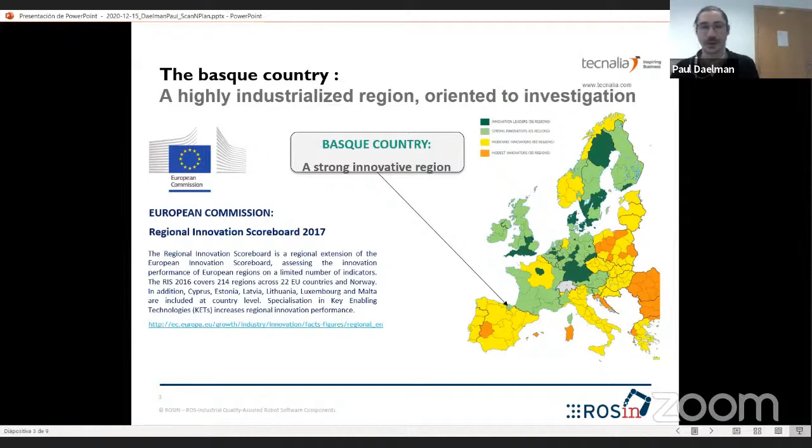We are based in the Basque Country, a very industrialized region. According to the 2017 Regional Innovation Scoreboard, the Basque Country has been classified as a strong innovative region by the European Commission. We have a strong industry here, gathering machining tool manufacturers, train and bus manufacturers, and big suppliers for the automotive sector. Combined with the biggest investment for R&D in Spain, this makes a good environment to introduce the ROS-Industrial problematics.

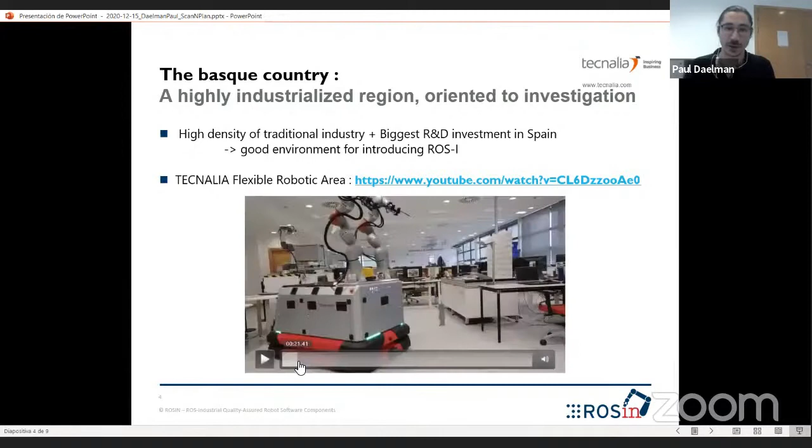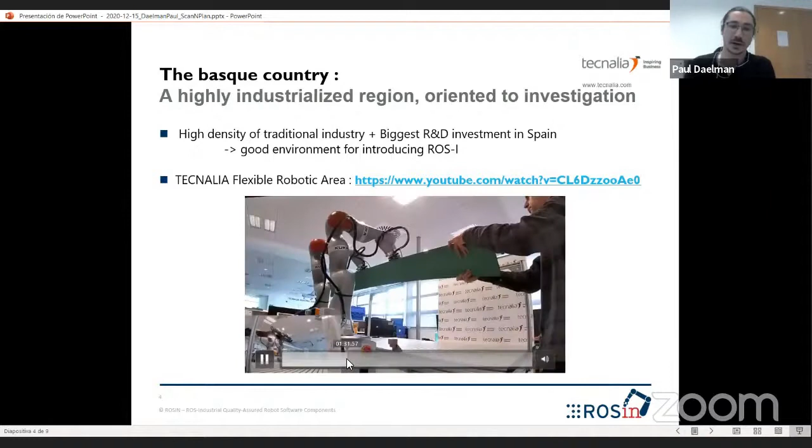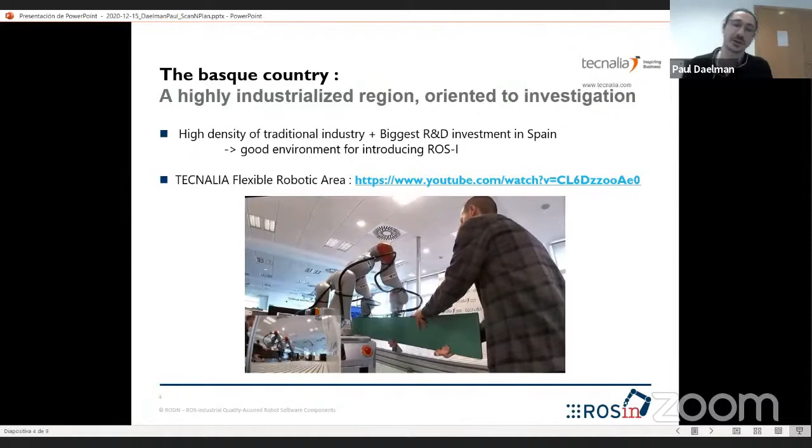More particularly, here in Tecnalia Robotics, we deal with various aspects of robotics. I won't show you the entire video because it's quite long, but this is a result of some projects we are dealing with. We work with mobile manipulators, also dealing with things like perception of humans or parts, working with collaborative robots, and implementing various applications oriented to collaboration and collaborative robotics. Feel free to ask for more information about that during the exhibitor time. We will be present to give you information if you want.

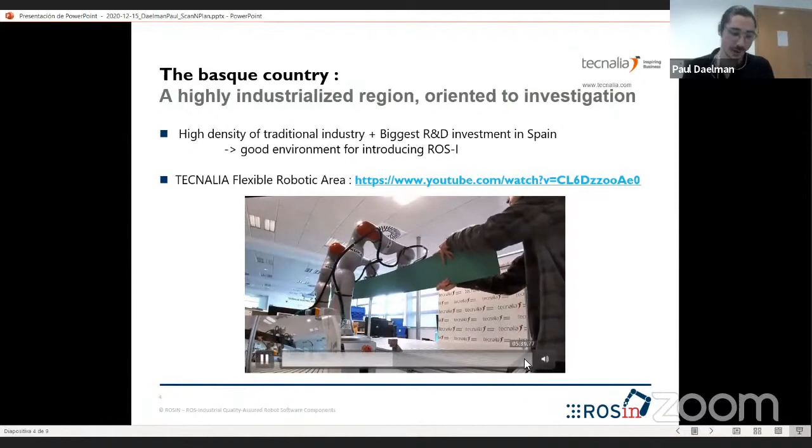So that's for Tecnalia. So why did we decide to show the ScanNPlan demo?

Initially, we planned to present this demonstration during the Bienal Internacional de la Máquina Herramienta, the International Machine Tool Exhibition, which should have taken place in Bilbao this year during the month of May. But due to the COVID crisis, this event has been cancelled, which is quite sad for us.

The objective was to show that ROS provides helpful tools for complex robotic applications, and that an application like ScanNPlan deals with various problematics difficult to overcome with traditional programming, such as huge amounts of different parts, possibly unavailable CAD models, and flexible and deformable parts in applications. All those problematics are quite difficult to overcome with traditional programming, and require a lot of time and resources to do without the ROS environment.

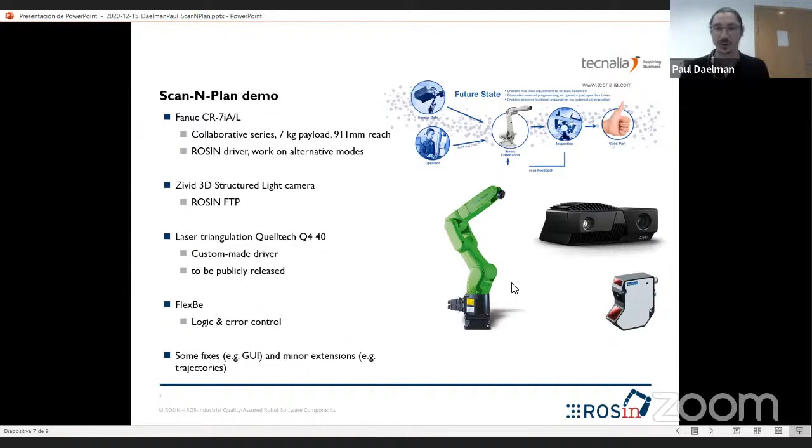So let's switch for the live demo. Hope it will be doing well. I'll be changing my setup, so...

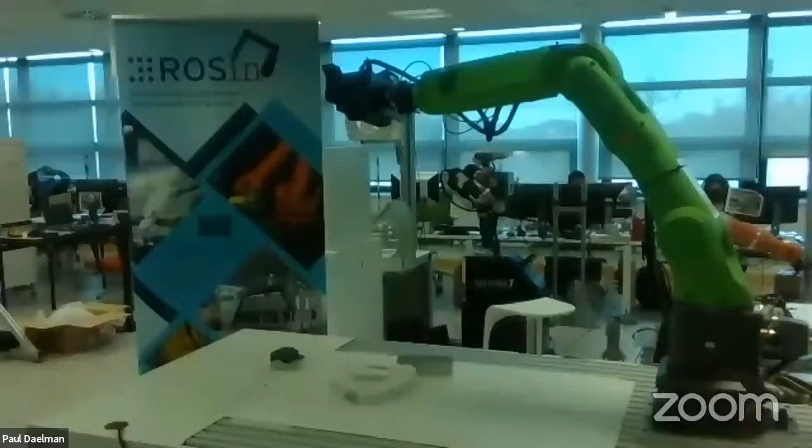Here you should be able to see the robot actually in the lab. And I will be showing the Ubuntu desktop, so you can see what we are doing also on the Ubuntu side. So here we have the ScanNPlan app with a different values panel, allowing us to control the app.

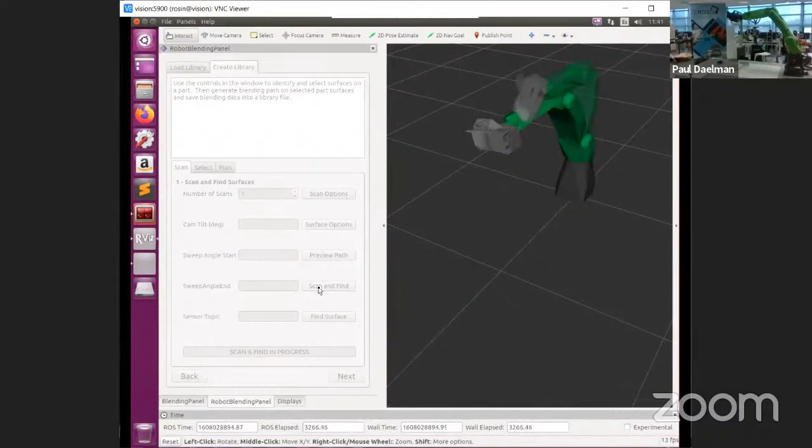From here, we are able to start a process and start actually using this ScanNPlan application.

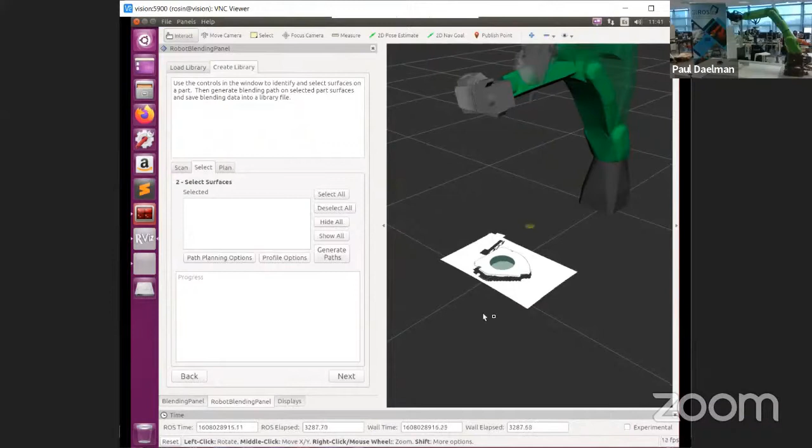So here we can see the result of the scanning process. The photo in 3D has been taken thanks to the Zivid camera you can see here on the manipulator. And we are looking for each plane surface on this photo.

So here we detected 2 objects on the scene. You can choose to work with one or another. And the application now allows us to automatically generate 3 different trajectories.

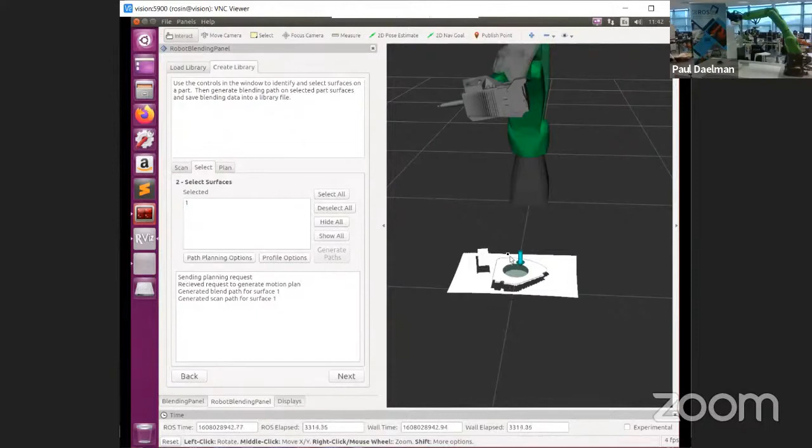The first one will be the whole blending of the surface. Secondly, will be doing the whole contour of the parts. And we have a last pass of scanning to show how good the process has been.

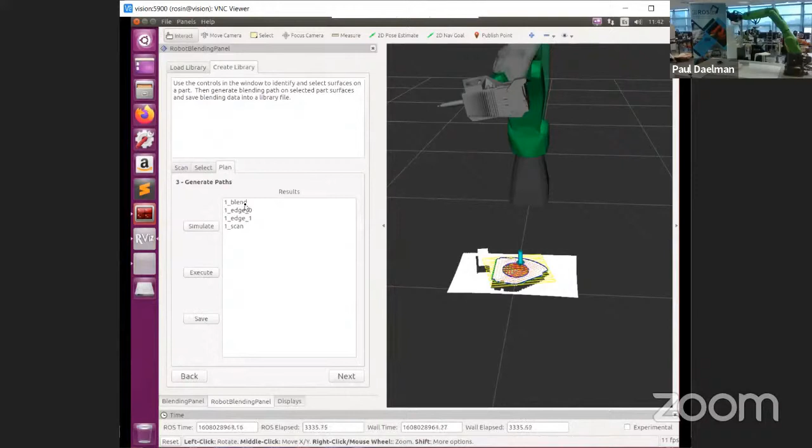So here we are able to simulate the process in case you want to assure yourself that the application is doing correctly. And you can execute each pass of it with the actual robot.

So here the robot is blending the whole surface of the part.

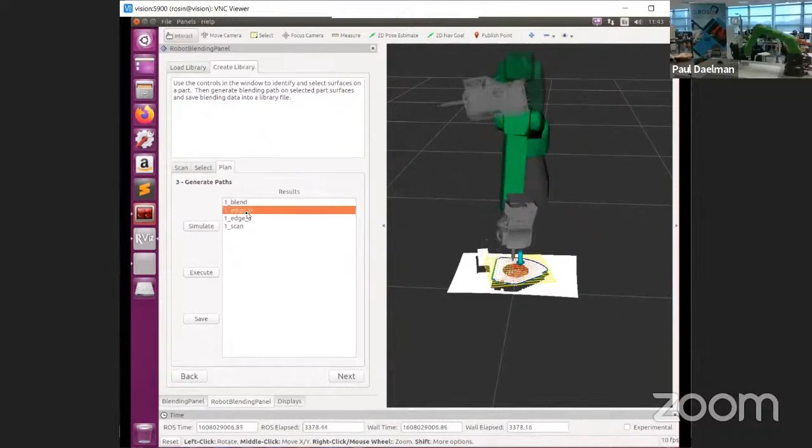In a second time, we detected 2 different edges on the part, so we can also use those paths and execute it.

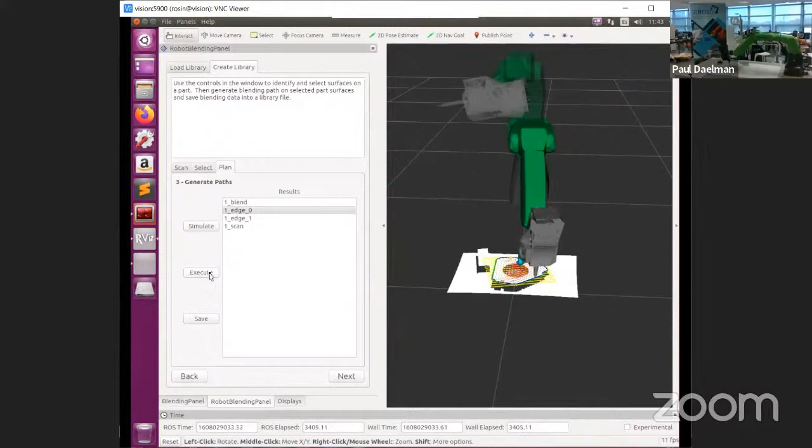So I hope that you can see properly the robot moving on my webcam. Yes, we can see. Yes, good.

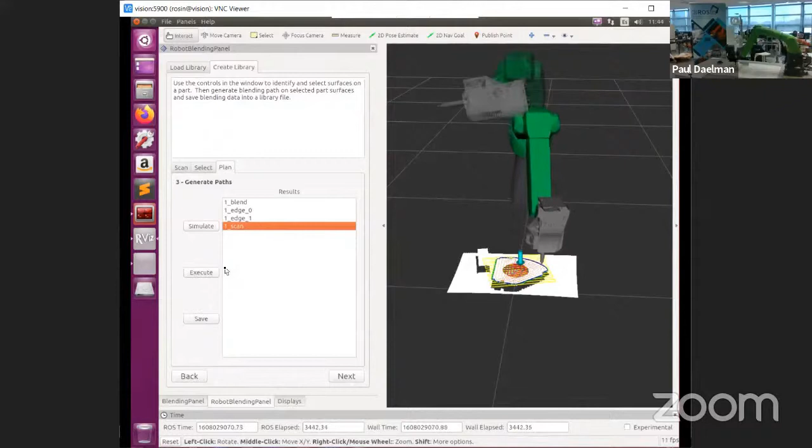And as a final process, we're also using the Qualitech laser to do some quality measurement on the part, being able to actually verify if the process has been done properly.

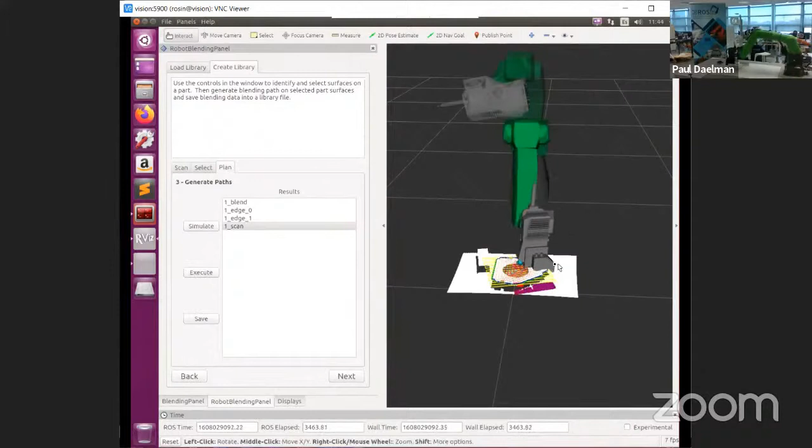So here, I didn't specify it, but the end effector of the robot comes with 3 different TCPs. Here we are using the laser TCP. We also have one dedicated to the Zivid camera, and the third one for the tool. So depending on what application, what movement we are executing, we use a different one.

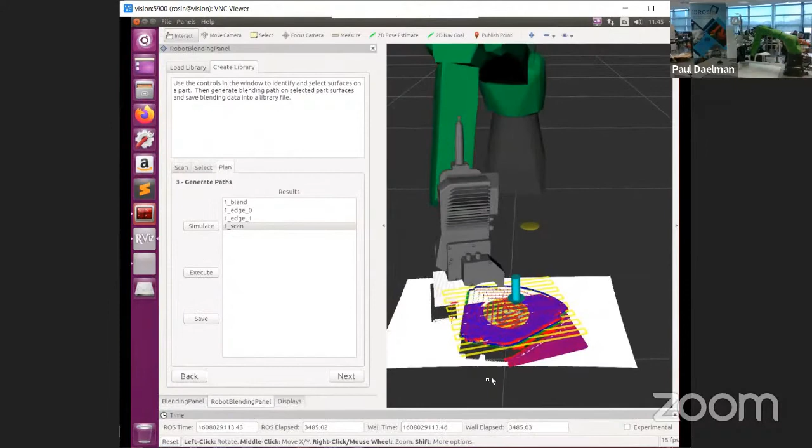So you can see that the laser is actually filling a new point cloud, which is actually another detection of the part that can be used to ensure that the process has been done correctly.

In addition to this application, we were also using the FlexBE environment, which provides us tools to automatize the entire application, do some error control, and log different problematics that can occur during the application. So it gives us the opportunity to make a whole automatized process.

So to show you a little more of the versatility of the application, I will change the parts' places. So with the new setup, the application will start, I hope.

Maybe we're experiencing some trouble with the FlexBE app. Okay, so I won't be able to start it. Sorry for that. So let's do it the old manner.

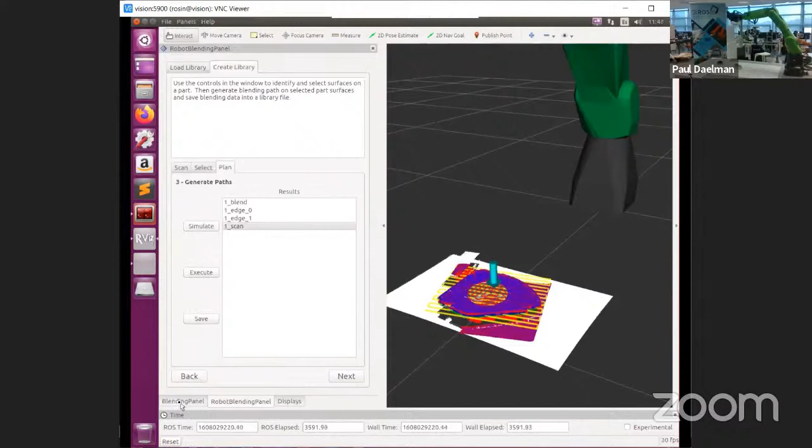So here we are grabbing a new photo of the scene. You can see we now have just one part on the scene.

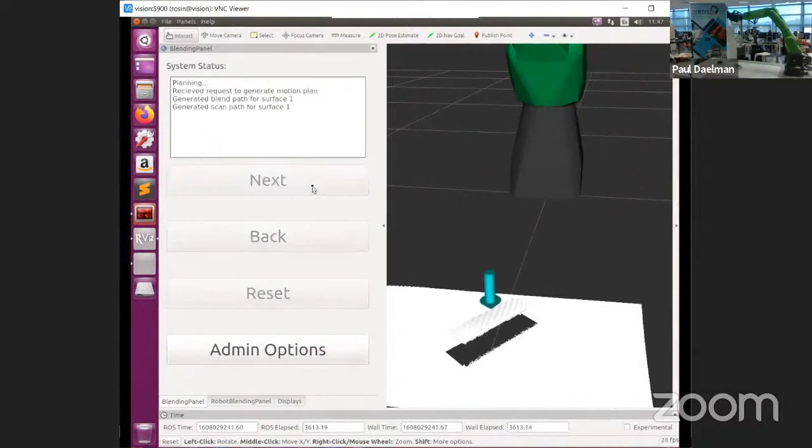We're actually generating trajectories again for this new part. So we generated 3 trajectories: one for blending the whole surface, one for the edge, and one for scanning.

We are now able to simulate all 3 trajectories, and now able to execute the whole process with the real robot.

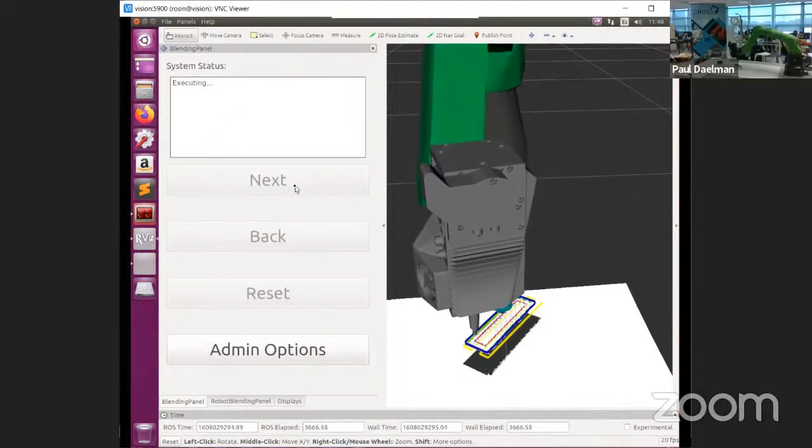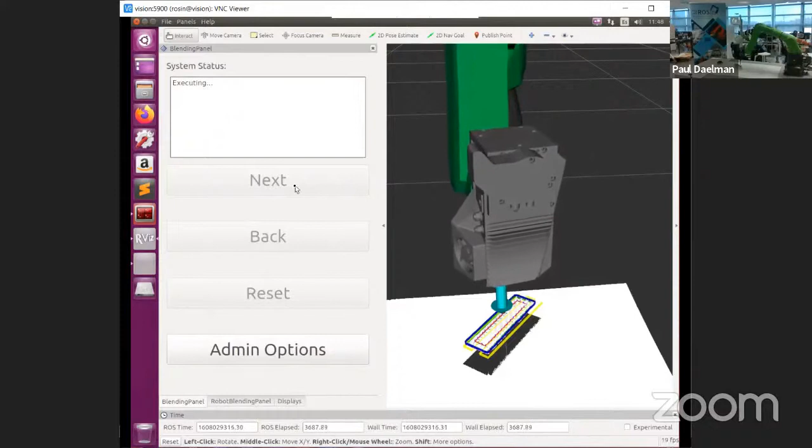So this kind of application really comes with high versatility. We are able to work with different kinds of parts that can be placed wherever you want in the scene. We are able to gather different point clouds if you are working with parts which are bigger, so that you can't have a correct view of it with a single photo.

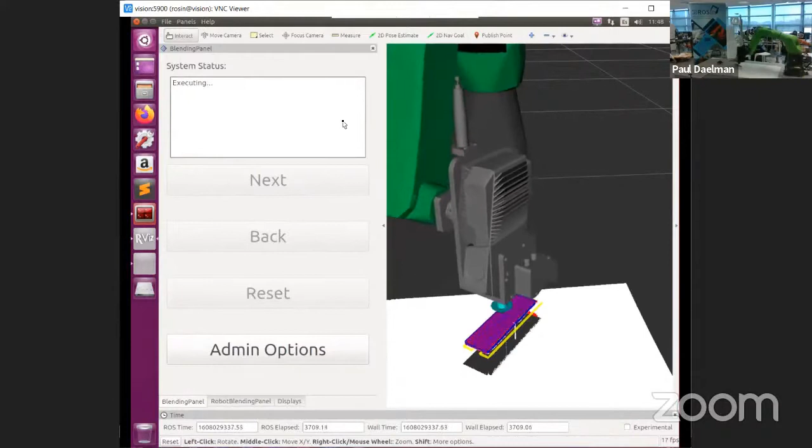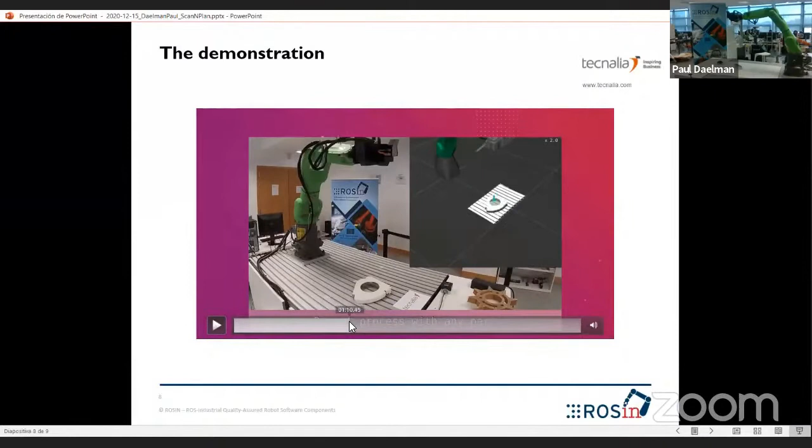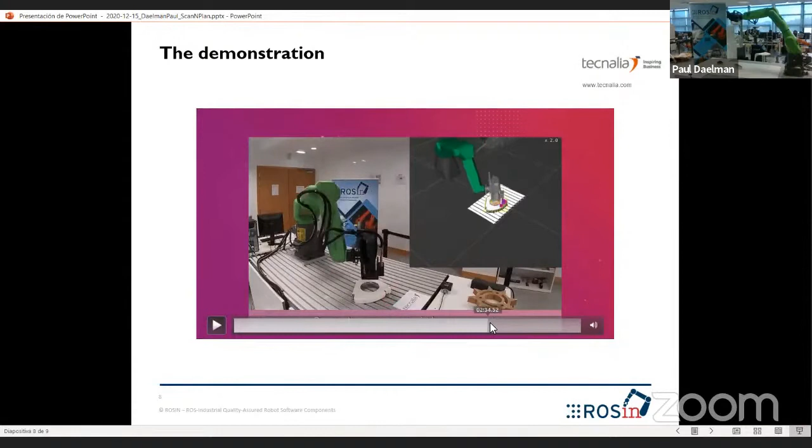Actually changing parts, you're also able to define different kinds of trajectory as the application requires. As an example, here for the same part, we are generating different trajectories. One will be using the biggest concave polygon to do the scanning, the blending part, and one which will be running the whole part and the whole field of the part.

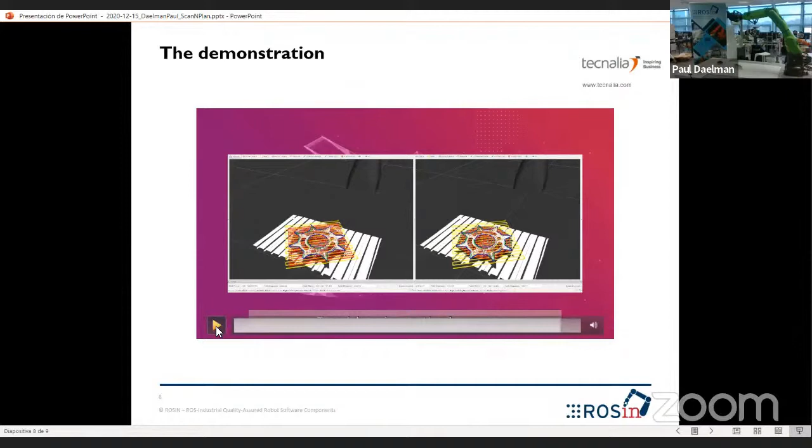So that's it for this presentation. I hope you find it interesting and relevant. Thanks for your attention, and I will be pleased to answer your questions at the end of the session.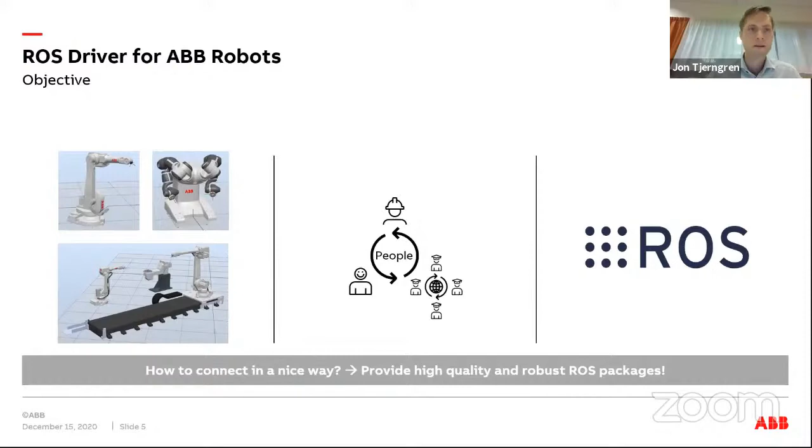Okay, so as a small recap, I had a presentation at the ROS-Industrial Conference 2018, which was also due to the ROSIn project, where I presented some communication packages I had developed for interacting with ABB robots. So I have naturally built upon those packages to create a ROS driver for ABB robots.

And the driver basically consists of 3 main nodes, and this is to separate the concerns, to make it easier to maintain, and also increase the flexibility, so you can use the parts that are useful or needed for the application in mind.

So 2 of the nodes are using something called Robot Web Services interaction, which is for general purpose interaction. You can use it to collect robot state, trigger IO signals, and start the program running on the robot controller. Then there's another node for using something called Externally Guided Motion, which is more for direct motion control, and it's based on using a ROS control based node. So these nodes are basically ready to run after a short configuration.

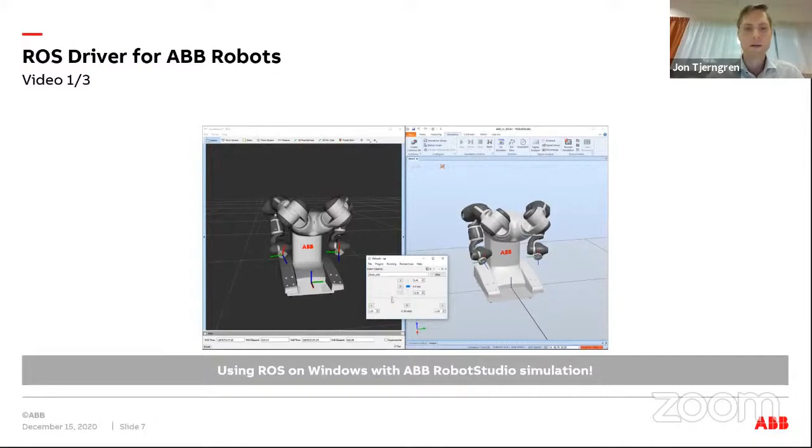Okay, so to the left we have RViz in Windows and a slider that I'm moving, and this basically moves the robot in Robot Studio to the right.

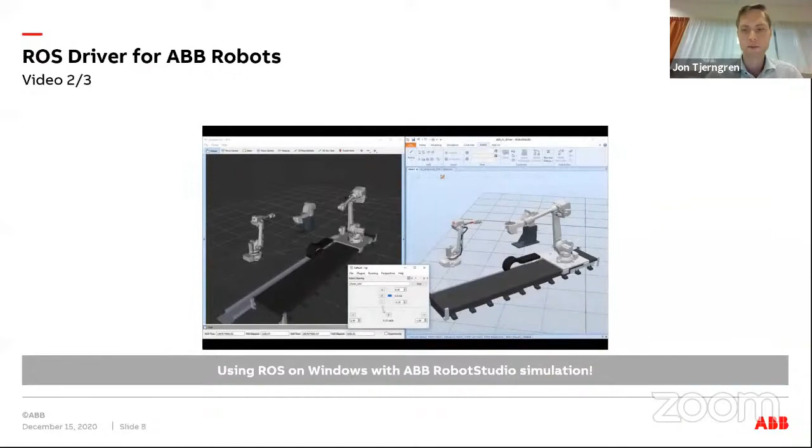So this was a very short video, but you can also have a more complex setup. So with 2 robots and a linear track and a positioner, and you can basically do the same after a few minimal configuration changes to the ROS side.

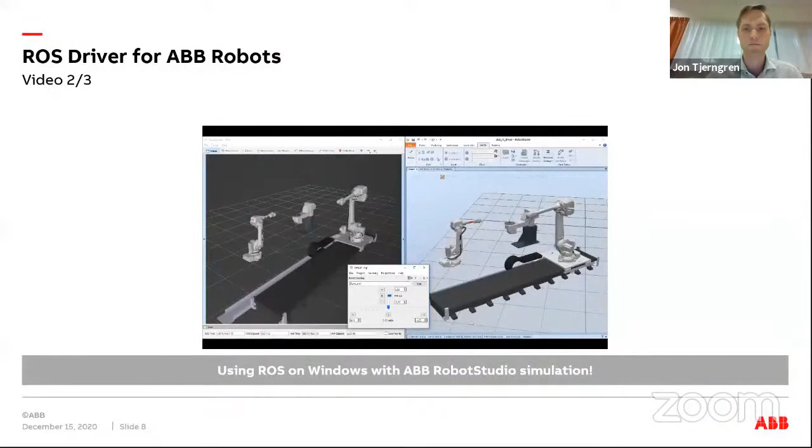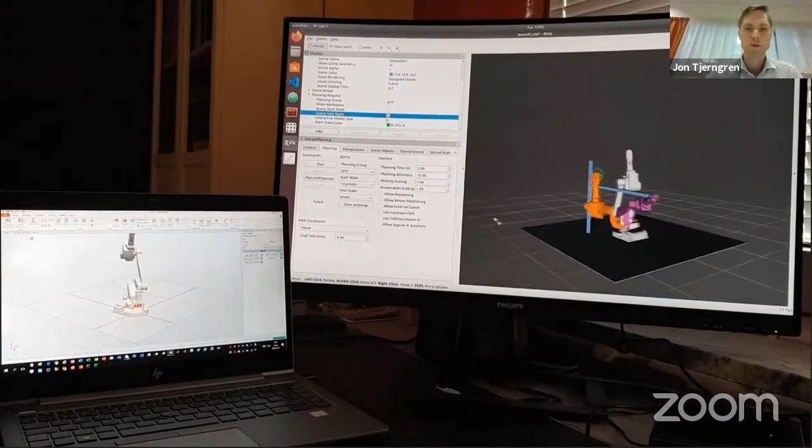And then a third video is for using ROS on Ubuntu in combination with MoveIt. So to the right you have MoveIt, and you can select a goal pose, and then send a plan request, execute request, and then the robot moves in Robot Studio, and it is reflected in the RViz application.

And it finally went to the goal position.

So this was very briefly about the ROS driver I had developed, and here are some key points. The ABB robot driver packages will be released as is on GitHub, which means that this is not a product from ABB. So it will only be limited support that users can expect.

And the open source release on GitHub is planned by end of this week. So the link in the bottom is currently leading to a private repository, but it will soon be public.

And the intended audience for the driver is academia. And the driver works well with both ROS on Ubuntu and Windows, so it's flexible.

And the driver makes it quite easy to set up simulations between ROS and the ABB Robot Studio environment. And this can, for example, be used for automatic testing and simulations, and also to faster develop applications.

And it makes it seamless to switch from simulation to a real robot. It's basically just a change of IP address and maybe a port number.

Okay, and there are some limitations for ABB robot controller types. So right now it's only IRC5 and RobotWare 6 systems that are supported. Omnicore and RobotWare 7 systems are currently not supported, but no decision has been taken for this yet, but it might happen.

Okay, now over to the second part of my presentation about the mobile manipulation demo. And first off, a short overview.

So last year, ABB showcased a mobile YuMi concept in Texas, or at Texas Medical Center in Houston, Texas. And here in the demo I will show, it will be used for a logistics demo, which has been developed during this ROSIn European project.

And yeah, unfortunately, due to the COVID-19 situation, it will not be on site in Stuttgart, as was the original intention, but we will be live streaming it later during the exhibitor time slots, both today and tomorrow at these times.

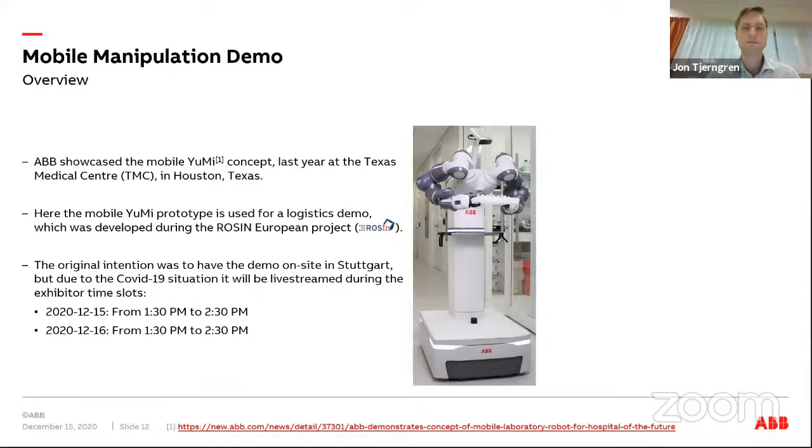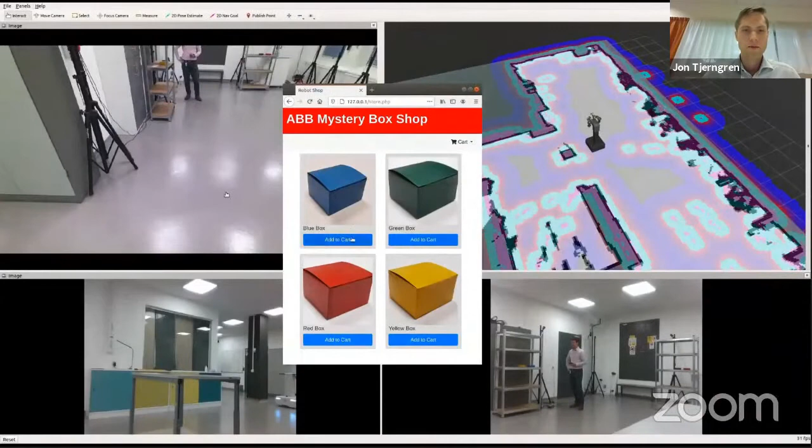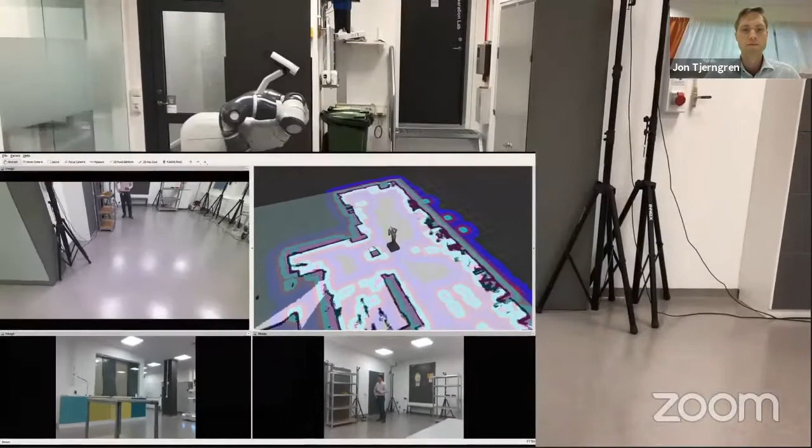So here I'm placing a request for some mystery boxes. And then I will send a buy request, and it will be sent over to the mobile YuMi, which starts to navigate in the lab and goes to a shelf with the boxes.

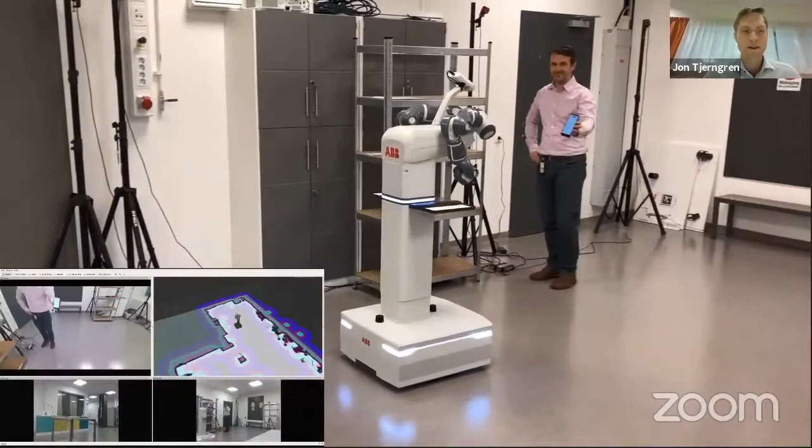And here my colleague shows a list he's gotten on his smartphone to pick and scan and place them on board the mobile YuMi. And then for another shelf and more boxes.

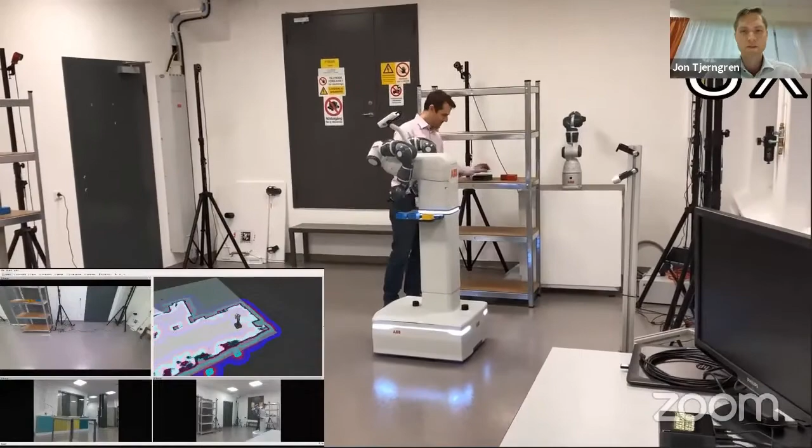And then the platform moves over to a delivery table and docks towards the table using this April tag and the camera images.

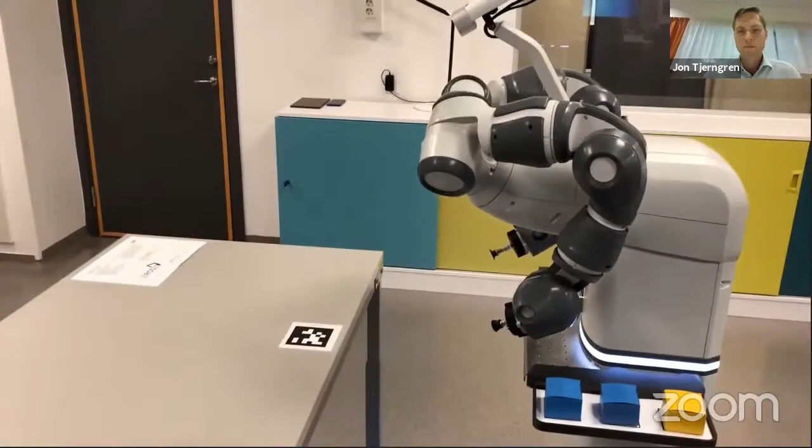And then YuMi starts to manipulate and pick up the boxes from itself and place them on the table. It will continue to do this until the boxes are unloaded, and then it will move over to a waiting location to wait for a new request.

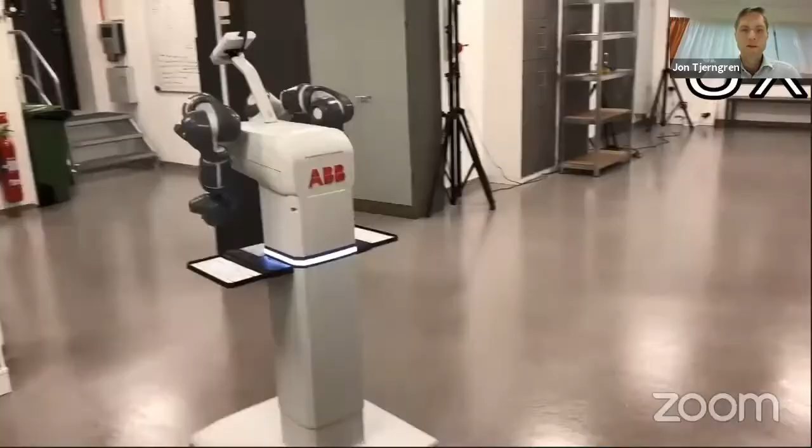And here I will not show the content of the boxes. I leave that as a cliffhanger for the live streaming event.